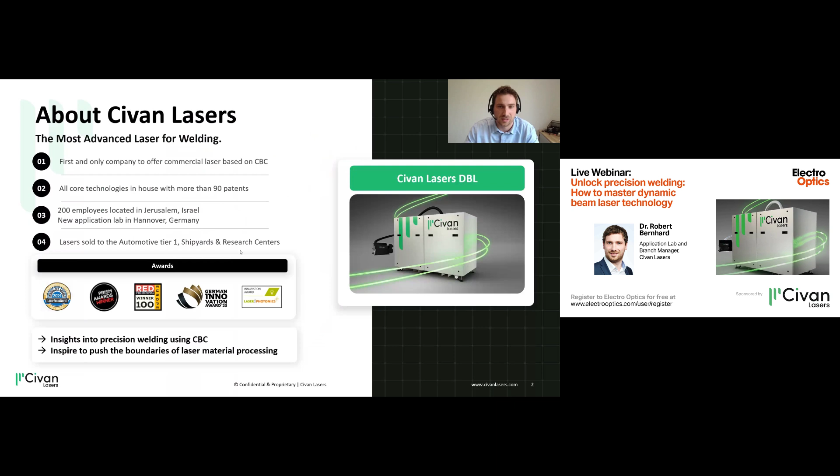Let's start with our laser and what the dynamic beam laser can do. On the bottom right, you can see beam shaping. We are looking into the focus of our laser, and we are able to do dynamic beam shaping. This is so to change the energy intensity during laser welding.

So we offer a laser with 7, 14, and 28 kilowatt laser power. And what we are doing is coherent beam combination. With this, as you can see, just a few shapes here, we can do arbitrary beam shapes. So how does it work is the question. We are actually the provider of the strongest coherent beam combining laser for laser material processing.

First, I would like to start with the basics and get you into the technology. So we are working with coherent beam combination. What does that mean? We have multiple laser beams that come from an amplifier stage that are combined. From grade 11 physics, you might know the interference patterns that can occur using lasers, and this is exactly the concept we are using. We have multiple laser fibers, 32 all in all, and they are doing constructive and destructive interference.

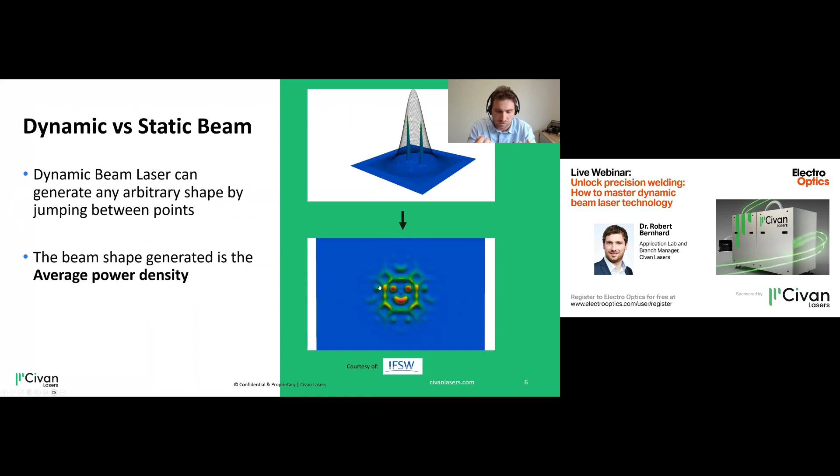So this, compared to other lasers, opens completely new degrees of freedom. You can see interesting beam shapes here on the right that are all generated using our laser inside the focus.

So what we can do is the beam shaping, of course, but we can also change the beam shape frequency, which is the frequency at which the shapes are generated. We can also make, kind of, movies with our beam shapes, and these motion pictures are like shape sequences, as well as doing focus steering, but more on that later.

Let's start by going through these new degrees of freedom for laser welding.

So what you do is you design your own beam shape. By designing your beam shape, we are able to do tailored to the material, tailored to your needs, the beam shape geometry, which means with the shape geometry we can also change the energy distribution in our focus spot, as well as changing the beam motion and the overall focus. So whatever your material might require and what your challenge might need, we are able to do different beam shapes.

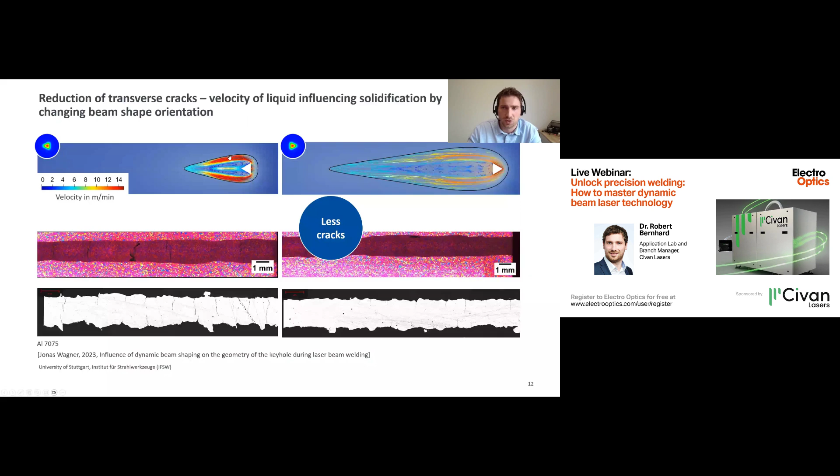Also, what we can do, because our beam shapes are generated completely electro-optically, we don't need to spin our optics. So if we are welding some kind of weld seam and we have to do some seam tracking with our beam shape, the robot or the machine doesn't have to rotate the workpiece or the optical head. We can do this all internally.

This can also be seen in this video, where you see the wave front and the front of the two dots that are actually aligned to the weld seam. This is a great way to compensate for gaps and also work on really fast welds with difficult contours.

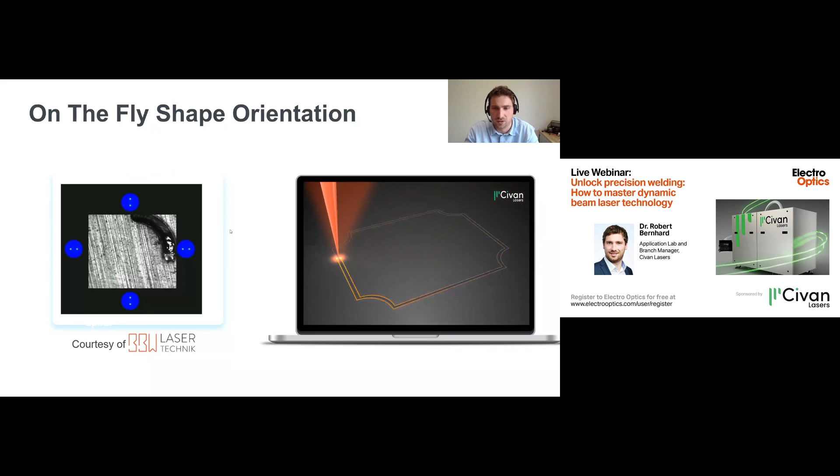So far, on the shape in general, but there's more to it. As I told you, we can go up to 50 megahertz shape frequency, which means how fast these beam shapes are generated. On the left side, it's an illustration of how you can think about that, but actually it's more about how fast these beam shapes are generated, and this also affects how the melt pool and the keyhole, as well as the fluid dynamics and surface tension, react to it.

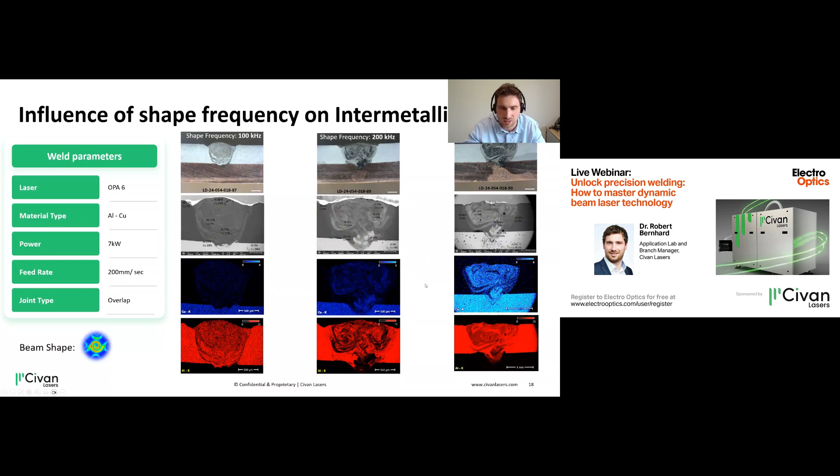There's more again, I guess: shape sequencing. We were talking about single beam shapes and how they are made up, and now we're actually able to do more than just that. This is fascinating because if you know a beam shape that does the intermetallic mixing, and a beam shape that works well for deep penetration, you can start and combine the positive effects of the two. So here you can see how it's set up in our software.

We have multiple different beam shapes, and then you can define the frequency we just learned about. And now we have the duration, how long a beam shape is present and how long the material sees the beam shape.

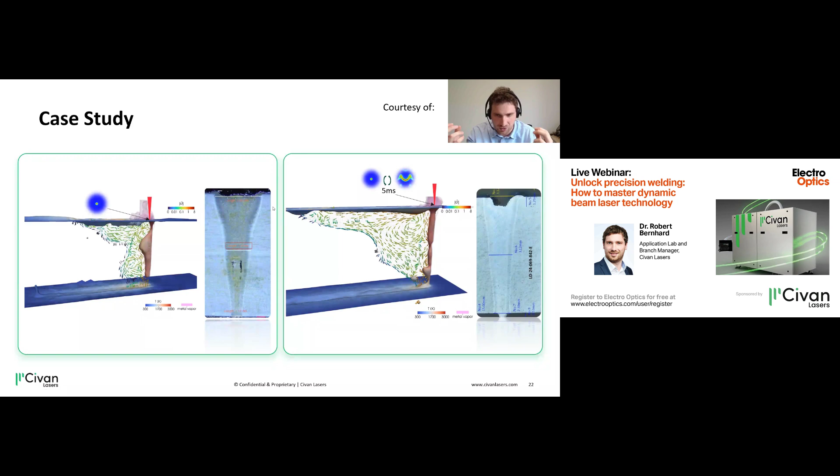This is also true for some hairpin welds we did. Here it is set up in a way that we have a beam shape set up directly over the hairpins, and by doing some time in this beam shape and then going over to a more random beam shape, we are also able to get the connection and the porosity out of the material without damaging the insulation and reducing pores specifically.

Now to the final thing I get about our laser. The beam works in 2D. We are also able to do 3D beam shaping. And we have a single mode laser, which already means that we have a very long focal distance, but also we are able to do the focus shifting using our electro-optical beam, coherent beam combining.

And the focus steering in these frequencies really helps to get the best results in deep penetration welding, but also working on lower depth, so we can adjust A for the workpiece and B for the things the material itself needs.

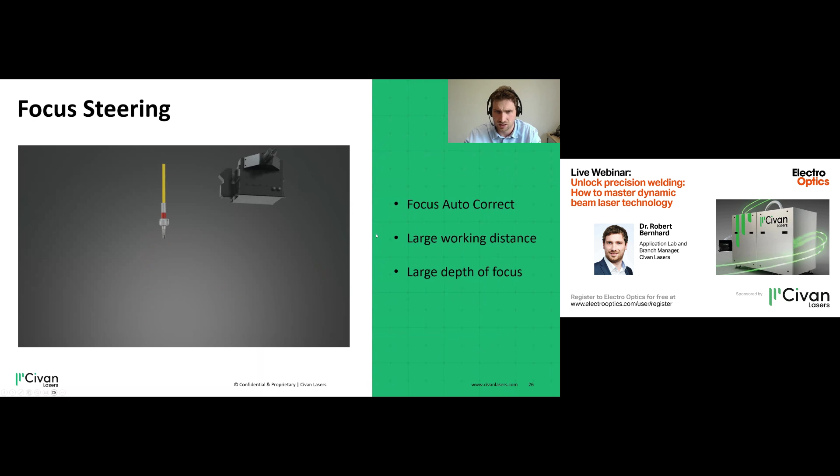So by doing this focus steering, in some installations, we can also get rid of a dedicated Z-axis. In regard of, here you can see that for welding hairpins, it increases the size of the working field, as well as working and shifting the beams so that all the welds are in focus, and we can adjust for inconsistency that might be due to a jig or something. So yeah, we are able to do the focus autocorrect here.

And now we talked a lot about the dynamic beam laser. This is just the conclusion before we go to the case studies and welding examples I want to showcase. First, we now know that the dynamic beam laser is able to do dynamic beam shaping. We are able to control the shape frequency, as well as doing shape sequences. We have a high beam quality, as well as focus steering, that finally can lead to focus autocorrect applications and makes it really broad for a wide use of laser material processing.

And that's the keyword, and my welding results and case studies will be on the next. We already touched the surface of what's possible, but this is just some applications where this laser is really capable of pushing the boundaries and getting into the material and beneficial process parameters, and it can be developed.

So the challenges in automotive EV are zinc coated steels. This is something our dynamic beam shape sequences can get rid of. The powertrain with electromotors is also something that we can actually really improve the porosity on. Other aluminium parts in the wheels, deep penetration wheel welding is the thing with adjusted and very no-porosity welds.

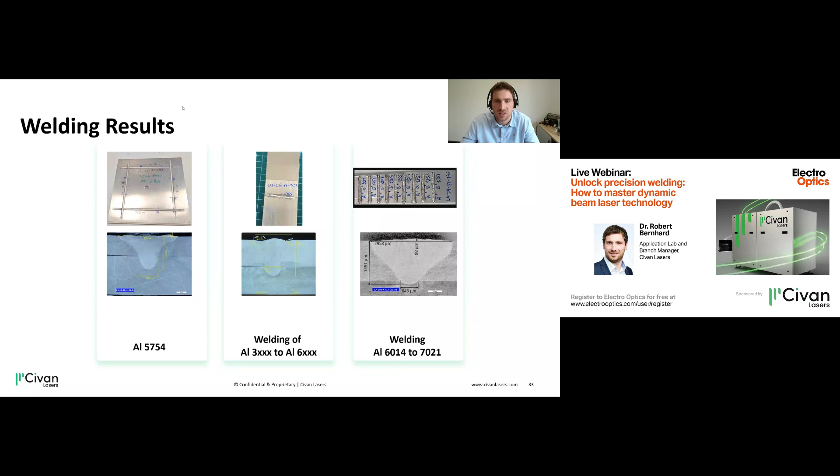So the welding results in this regard: aluminium, as well as welding 3000 series to 6000 series, as well as 6000 to 7000 series. And what you can see here, and I want to give an example on the left aluminium in a moment, is that our laser is welding these like with very nice cross sections, but also very fast.

So here we are talking about the welding of aluminium 5754, and we are reaching up to 500 millimeters per second. And while being this fast, we have these coupons that are leak-free at 2 bars. And then it's all about your application and your problem, where we can improve and go into more details with this. But generally, how is it done? We are using beam shapes and beam frequencies that make the interface very wide. We have enough power with our systems in order to get the welds done that fast and get the weld dimensions just right so that the material is leak-free welded.

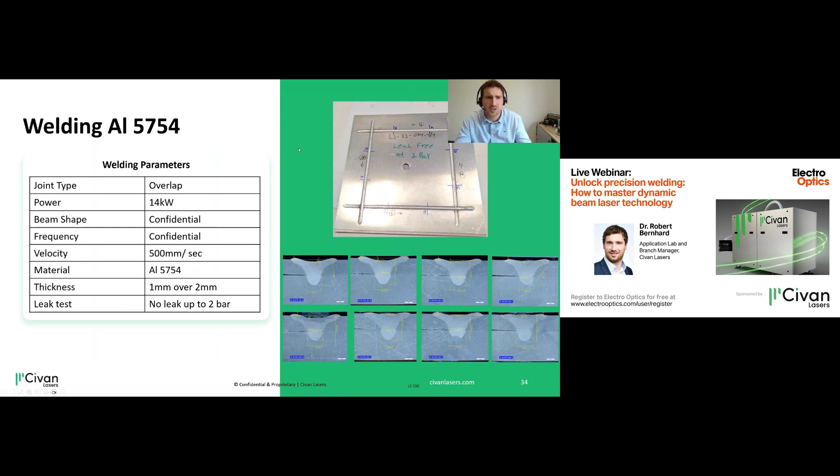This also is true for 6000 aluminium. Here we usually have problems with porosity because the keyhole collapses quite frequently. Even at lower speeds, you can see that on the left side, sometimes the keyhole collapses and then we have a pore inside the material. And this is even though we are comparing to a static disk laser.

With our dynamic beam laser, we're actually able to do the welding and make sure that, by a specific beam shape - here it looks like a boomerang kind of shape - we keep the keyhole open and distribute the energy just right in order to get the melt pool and material to flow beneficially for our process. So despite the scratches on the part, it's a very nice weld in terms of penetration uniformity as well as porosity.

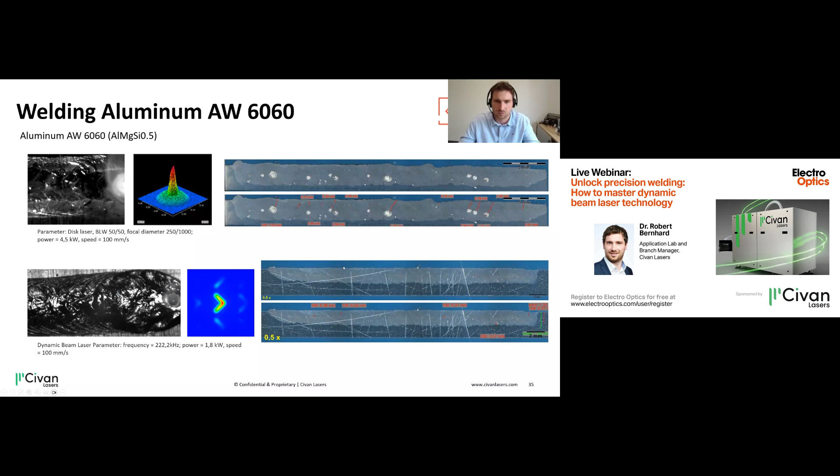This actually means we can weld up to 100 millimeters per second with this 6000 series aluminium, and usually there are cracks occurring as well as porosity. But if we use our boomerang shape or V-beam shape, we can reduce the porosity, and because it also adjusts the flow and the melt pool solidification rate, we are reducing our solidification cracks.

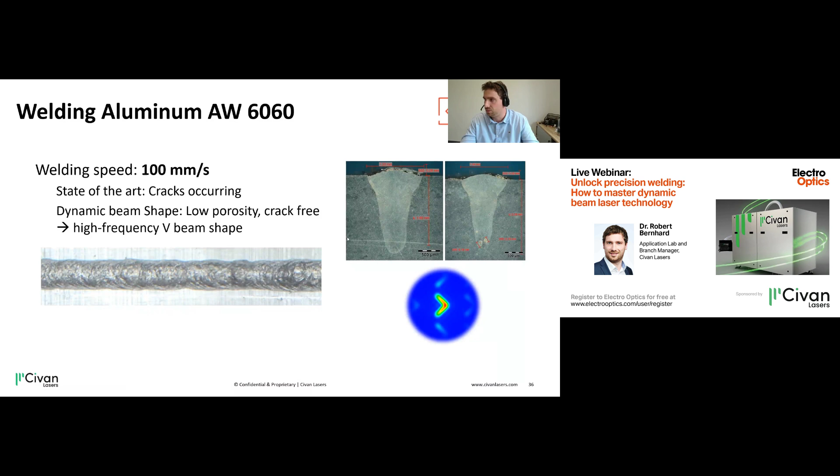But this is not all. Again, we are very broad on what we can do, and something I also personally enjoy is welding thick materials. It's always fun to see these very thick metals that can be welded by just the power of light.

And just the power of light here, with an asterisk, with dynamic beam shaping. Conventional hybrid laser processes need multiple passes, but because our laser can do more than just welding, we can also assign additional functions like melting the filler material or remelting at the end of the weld. So we are actually able to reduce the number of passes, and because it's a laser process, we don't need an arc burning - we're actually able to be way faster than conventional processes.

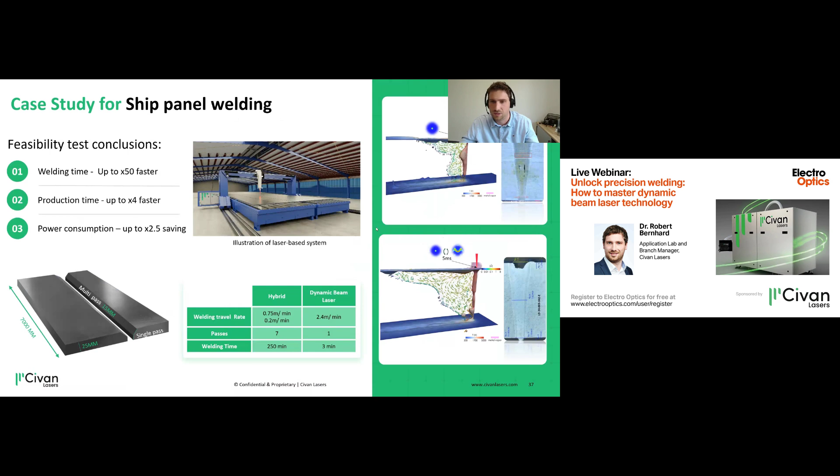So here you can see again the influence of beam shaping, as well as changing between different beam shapes. What this actually leads to is welding really thick sections. We're talking about mild steel, 70 millimeters, and welding this with a conventional laser without vacuum, of course, is a challenge. But by doing focus steering, we can go very, very deep into the material.

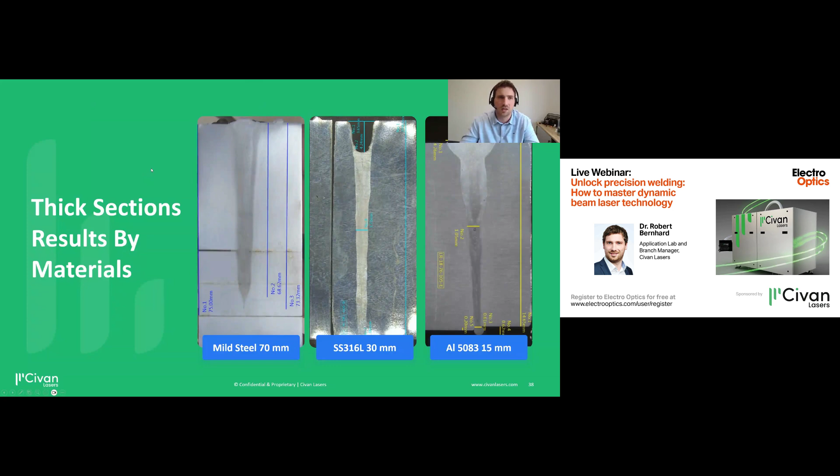And we are currently working on welding with filler material - this is also a process that we are capable of doing. Here again, doing the beam shaping and getting the beam shape to very reproducibly melt the filler wire, it's very nice to get a process that results in a very even and porosity-free weld.

Speaking of porosity, I want to also deep dive into aluminium die casts. Aluminium die cast, from the process itself, is made by die casting and high pressure die casting with a lot of dissolved gas. And if we heat the material up and bring it to the melting point, all the gases are boiling kind of and leaving the material. So with conventional lasers, you observe a lot of porosity, blowholes, keyhole collapses. And that's why the process is not really established in aluminium die cast welding.

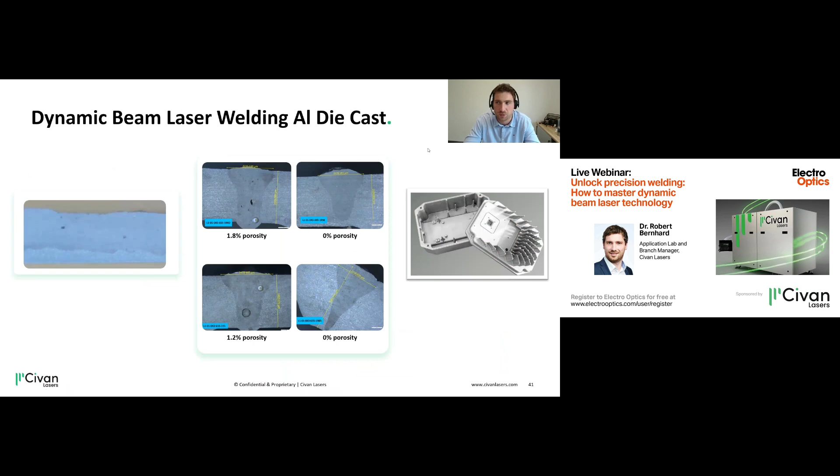So I think this encourages us to dive deeper into beam shapes and how they work with the material. What we've learned so far is that the capabilities of the dynamic beam laser give us control over the thermal distribution and thermal gradients in space and time, because we can work with the beam shape itself but also with the frequencies. On the other side, we can control the dynamic flow, which is also a result of all the parameters we just talked about.

This then leads to stabilizing the keyhole and the melt pool, as well as allowing us to tailor our weld geometry, if you want something wider with a wider interface for leak tightness, for example, or something with very small energy input. Our laser is very flexible in this regard.

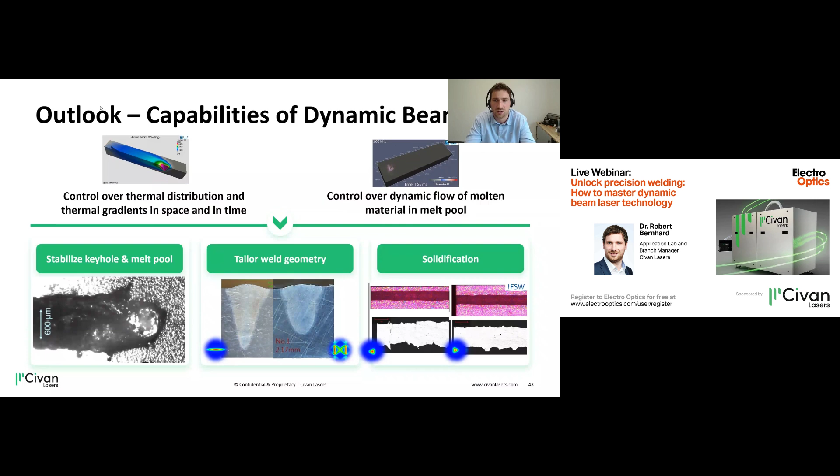Furthermore, with the solidification, we are also able to adjust and, to some extent, set the phases that occur inside the solidified material, because we can really precisely control how the weld behaves and how the melt pool cools down in terms of solidification.

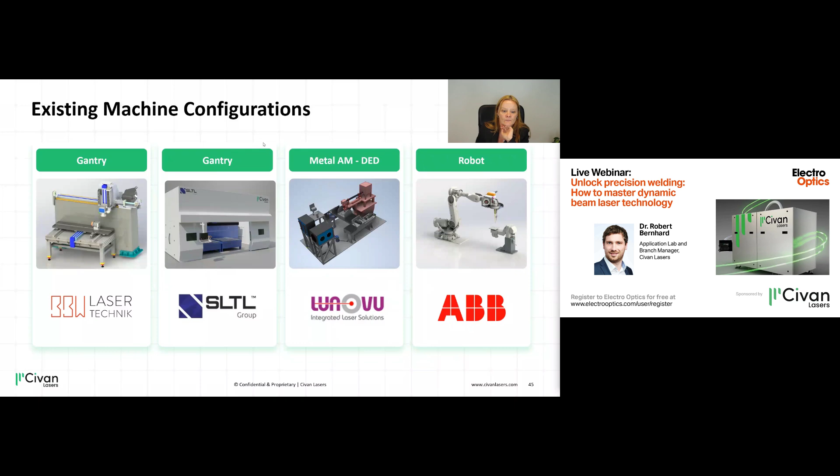Okay, brilliant. What's the minimum adjustable laser power, please? Going back to the initial, I think I can just press one. Because we have so many fibers and multiple amplifiers, the minimum power the machine we usually have is 7 kilowatts.